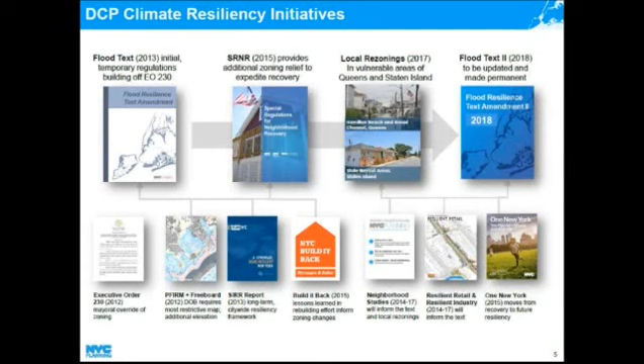To give a brief overview of the 2013 flood text, here's what is allowed. We increased the height limits of all buildings in the floodplain by allowing the height to be measured from the design flood elevation, which is that FEMA reference standard plus an additional level of what we call freeboard, and in some cases to a higher reference point that in essence lifts the entire envelope of the building up to correspond to the new flood insurance, the new flood map requirements.

We also allowed for a discounting of floor space when lost in order to come into compliance where the latest building standards for such things as raised entries, mechanical spaces, and flood areas are required. We allowed for the retrofitting of older buildings, overriding typical zoning rules for non-complying and non-conforming buildings, as well as established design standards requiring elevated buildings to mitigate their impact on streetscape.

In 2015, the City Planning Commission passed the Special Regulations for Neighborhood Recovery, intended to speed recovery from Hurricane Sandy in select neighborhoods with acute problems. This was done by simplifying the process for documenting non-compliances for Sandy-damaged homes, removing disincentives for property owners to make resilient investments, and establishing a new zoning envelope, particularly for narrow lots, so reconstructed homes more accurately reflect the existing cottage neighborhood character.

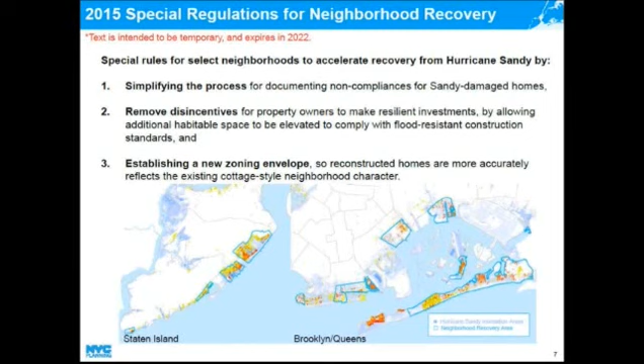While that work was going on, we were also working on a series of resilient neighborhood studies. They include projects in all 5 boroughs: Harding Park and Edgewater Park in the Bronx, Chelsea and West Chelsea and the East Village Lower East Side, and 2 Bridges in Manhattan, the East Shore on Staten Island, Sheepshead Bay, Gerritsen Beach, and Canarsie in Brooklyn, and Hamilton Beach, Old Howard Beach, Broad Channel, Rockaway Park, and Rockaway Beach, all in Queens.

These 10 study areas are intended to help provide lessons learned that would inform the citywide flood text we anticipate moving forward in 2018. We anticipate most issues raised in other areas will be addressed through the citywide flood text. We also intend that the overall approach to land use for coastal areas will be informed by these studies. Most relevant to today, we've identified the need for near-term zoning changes that weren't resolved through the citywide flood text, including Broad Channel, Hamilton Beach, and the Staten Island East Shore.

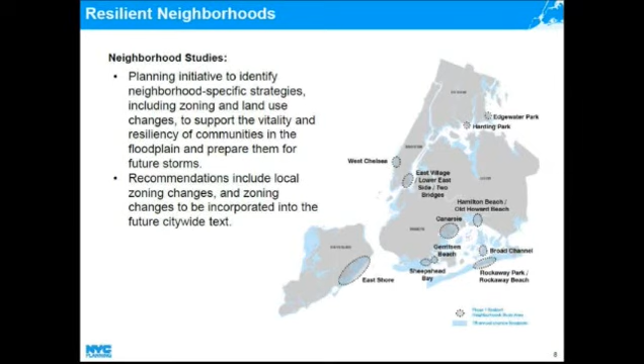But some of it does include inhabited areas as well, including the areas we'll be talking about today, Broad Channel and Hamilton Beach, as well as a portion of the east shore of Staten Island, which will be protected from daily tidal flooding with the Army Corps' proposed levee system.

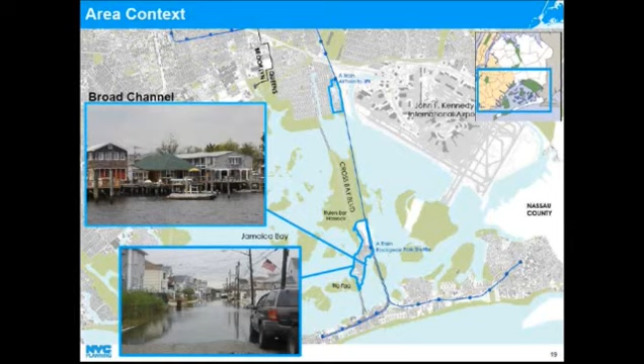A little background on the neighborhood is important to understand our proposal as well. In the late 1800s, this neighborhood was developed with small houses built on stilts as a summer getaway. They were houses accessible by boat. This predated roads. It was formally settled in 1914 by the Broad Channel Development Corporation, which really built the land — they filled it in because it was formerly marshland, and built the first roads.

It wasn't until the 1930s that Cross Bay Boulevard was constructed, really opening up this community to the rest of New York City. But in 1939, the Development Corporation declared bankruptcy, and the city took over ownership of the land. It wasn't until 1982 that an agreement was reached for the residents to purchase the land back from the city. In 1988, the first sanitary sewers were constructed, so it took a long time until infrastructure was developed here, and it is still limited.

And in 2012, it's fair to say it was devastated by Hurricane Sandy. 97% of the households here reported damages during FEMA inspections, and the average NFIP claim paid in Broad Channel was $76,000.

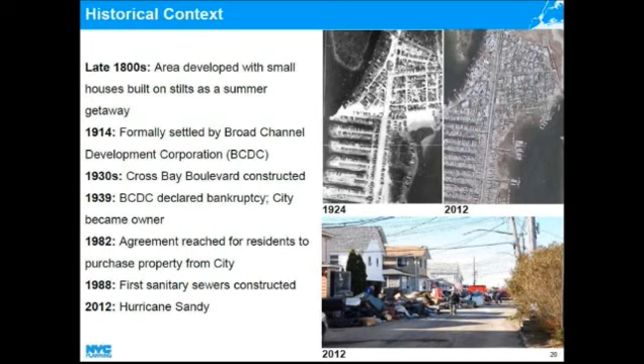In Broad Channel today, there are 2,500 residents and about 1,000 buildings. The local median household income is quite a bit higher than the Queens average, at $68,900. And the percentage of housing units that are owner occupied is also higher, at 78%.

It's also worth noting that all residents and buildings in Broad Channel are in the 1% annual chance floodplain, including — I don't have the exact numbers — a few in the V zone, which is the wave action zone that is especially susceptible to damage.

The zoning in place today is R3-2. It's been in place since the zoning resolution was adopted in 1961. This zoning allows for all residential building types, but in the top left image you'll see the most common kind of lot and building in Broad Channel. The typical lot is 25 feet wide by 100 feet deep, and 90% of homes here are single-family detached, with only 9% two-family detached. There are a few homes that are semi-detached, as seen in the middle picture, but these are pretty uncommon.

So this R3-2 zoning, with a 40-foot minimum lot width requirement and allowance for these other building types, is not really appropriate given the context of the area. In addition, the zoning doesn't reflect that there are a number of marinas and boat parking facilities on the southeastern shore of Broad Channel — that's one thing we looked at in crafting our proposal. There's also a commercial overlay at the center of Broad Channel, a small local retail node with a restaurant, a deli, and things like that. It's zoned C1-2.

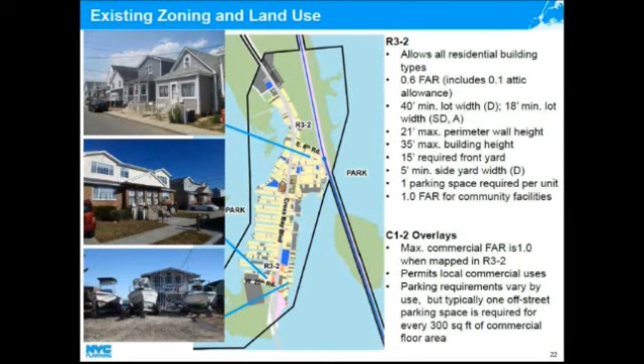On the high end, the 90th percentile projection is for 30 inches of sea level rise on top of high tide, and that would impact 744 buildings out of 1,000. So this is a serious condition that's not really seen elsewhere in the city other than here in Hamilton Beach.

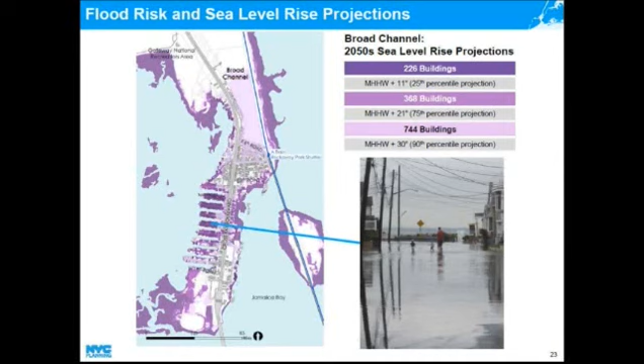Now I'll walk you through the proposal, the actions for Broad Channel, which include a zoning map amendment and a text amendment.

So first, perhaps the most unique part of this proposal is a new special coastal risk district, which would be established in the zoning resolution to provide a new zoning tool to signify flood risk in areas of the city vulnerable to projected future tidal flooding.

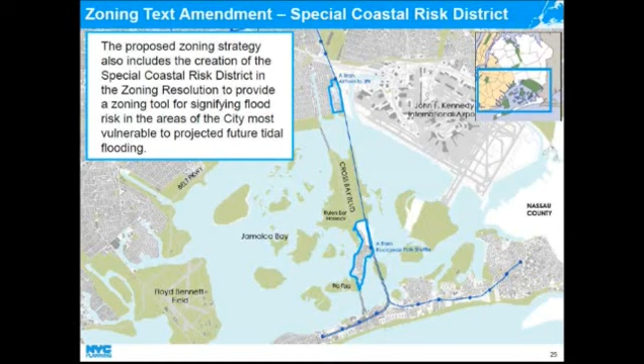So today we are going to talk about two sub-districts that are proposed in Broad Channel and Hamilton Beach that would have the same general purposes section, but would have different rules for each neighborhood to reflect unique conditions.

We're proposing a Broad Channel sub-district over the entirety of the island. It would reflect the neighborhood's exceptional flood risk and establish low-density building patterns by modifying the proposed underlying zoning to only allow single-family detached residences to be allowed here.

We would also prohibit community facilities with sleeping or overnight accommodations. Even though there's a library and a school, there isn't anything like a nursing home here today, but we wouldn't want vulnerable populations to move into an area where there really aren't infrastructure solutions and where we don't think future density is appropriate. So again, the main restriction as part of this sub-district is limiting future residential development to single-family detached only.

This would modify the two proposed underlying zoning districts, one being R3A, which better matches the built conditions here. This zoning district, it's worth noting, has a 25-foot lot width minimum, which is the same general lot width that we find here in Broad Channel. And again, this would be modified by the special district.

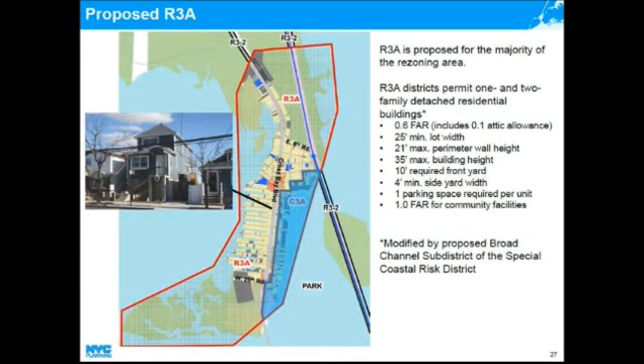We are also proposing a C3A district on Broad Channel's southeastern shore, where I mentioned that there are a number of marinas currently. These marinas could not rebuild under existing zoning - those uses wouldn't be allowed. So we want to allow, if a future storm comes through, we want these marinas to be able to rebuild. We think it's appropriate for the neighborhood character of the area and reflects the type of community that Broad Channel really is.

C3A also has a residential equivalent of R3A, so the same special district restriction would apply here to only allow single-family detached residences in this portion.

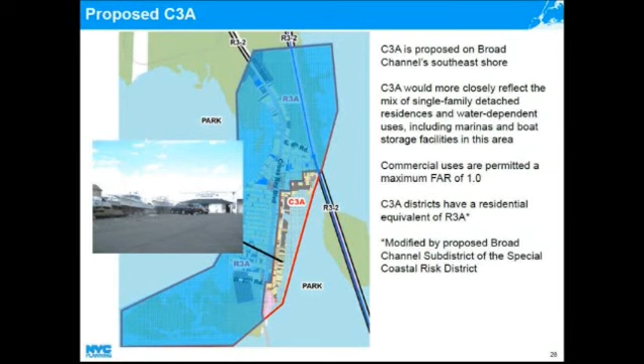Finally, we are proposing to update the existing C1-2 overlay to a C1-3 to slightly reduce the off-street parking requirement. The C1-2 district requires 1 space per 300 square feet of commercial floor area, which existing businesses would have a hard time meeting if they were to redevelop. So the C1-3 requires 1 space per 400 square feet of floor area. This is just a small tool that we can give to businesses here to not disincentivize them from making resiliency investments.

And next, I will talk about Hamilton Beach.

Perhaps before we go to the next item - any questions for Melissa? Okay, Erwin, and then Fred.

Melissa, is the long-term goal to evacuate this area or to maintain this area? Would you like to take that?

That's an excellent question. And I think that as of the moment, we are not suggesting that the policy has to be retreat. But what we are recognizing is that the future, whatever it may be, is going to look very different than that of today's. And so we see this tool, this special district, and the appropriate zoning changes as a way of trying to limit the future density over the course of the next several decades as we figure out what that eventual future may be.

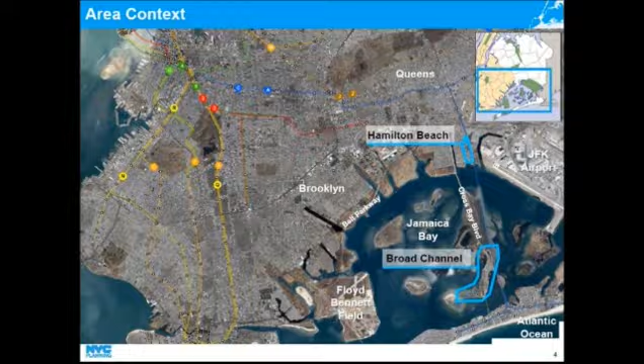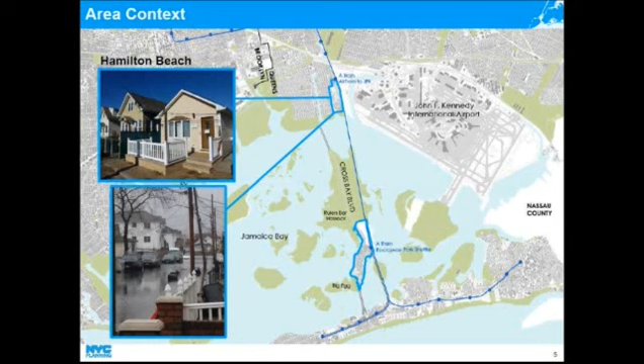Hamilton Beach is also a neighborhood in South Queens that's adjacent to JFK International Airport. It's also accessible by only one road, 102nd Street, which routes through Coleman Square, a small commercial node that serves the A train and AirTrain station. Much like Broad Channel, Hamilton Beach was originally developed with fishermen's shacks on Hawtree Creek. In the late 1800s, a Long Island Railroad station was opened.

And I say station because you had to flag down the train to get it to stop for you, but this supported the establishment of a year-round community. In the early 1900s, Hawtree Basin was dredged, and that was used to fill in the land to allow for additional development. But it wasn't until 1995 that the city first expanded its sanitary sewer system to Hamilton Beach, and before that, residents relied on private cesspools. In 2012, the area was also ravaged by Hurricane Sandy. I don't have the number specifically for Hamilton Beach, but in the combined Old Howard Beach and Hamilton Beach area, 75% of households reported damages during FEMA inspections. The average NFIP, National Flood Insurance Program, claims paid to Hamilton Beach was $52,000.

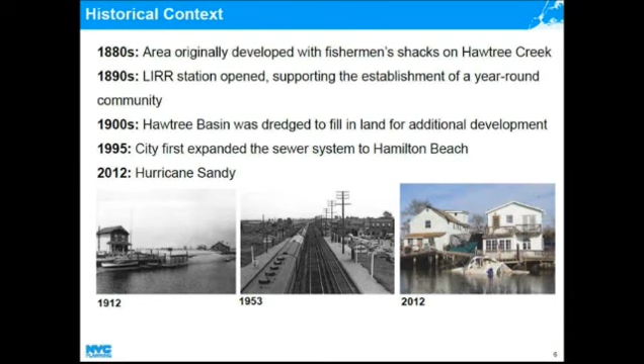This map shows a little better where the one road to access Hamilton Beach is, 102nd Street. Today in Hamilton Beach, there are 1,400 residents and 400 buildings. The median household income is higher than the Queens average at $71,000, and 75% of housing units are owner occupied. Also, it's worth noting that almost all of the residents and buildings in Hamilton Beach are in the floodplain.

The neighborhood is zoned R3-1, a designation that has also been in place since 1961. It allows for one- and two-family detached and semi-detached residences. The one-family detached is the most common lot typology or building type. On the upper left-hand picture, you can see that common building type, this small cottage bungalow, if you will, on a narrow lot. Actually, even narrower lots here than in Broad Channel. Some are 20, 21, 22 feet wide, which is challenging with the 40-foot minimum lot width requirement under existing zoning.

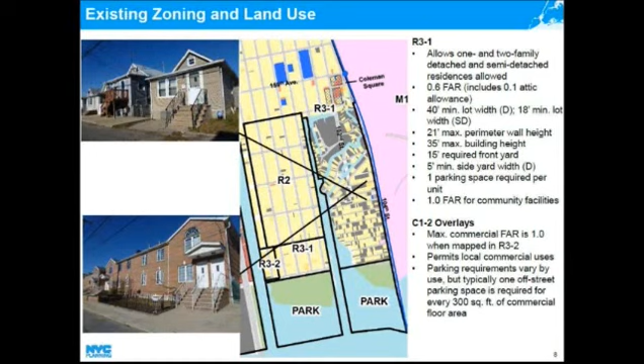7% of the houses here are two-family detached, and 13% are semi-detached, like you see in the lower left-hand picture, so they have this shared party wall. This housing type has actually been more predominant in recent years with the construction of housing on vacant lots. In Hamilton Beach, about 42% of lots are vacant, and 100 of those lots are city-owned. So while not all of those vacant lots are available to the public for development, they could become available in the future, and we think that the semi-detached type allowed now under existing zoning is not appropriate for the flood risk and also for the infrastructure that is currently available.

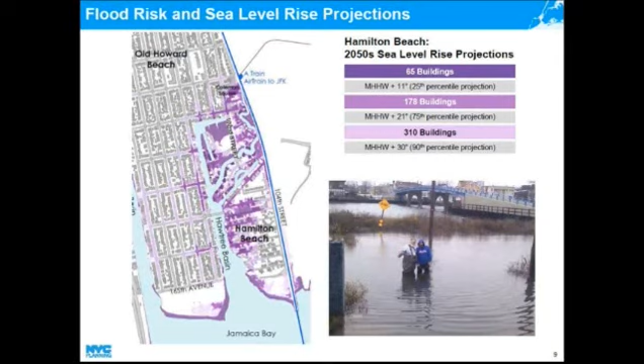This is the sea level rise projections for Hamilton Beach in the 2050s. The low-end projection of 11 inches with high tide is represented in dark purple. 65 buildings out of about 400 would be impacted twice daily at high tide. Under the high-end projections, the 90th percentile projection of 30 inches on top of high tide, 310 buildings out of about 400 would be impacted twice daily.

With that context, I'll walk you through the rezoning proposal. As part of the special coastal risk district that would be established as part of the broad channel application, we are proposing also a Hamilton Beach sub-district that would modify proposed underlying zoning. The sub-district would signify the risk here and limit future development to two-family detached residences only on lots 40 feet wide or greater.

Single-family detached buildings would be allowed throughout the area. The reason for this change or distinction from Broad Channel is that there are actually a wider variety of lot sizes found in Hamilton Beach. So we do want to allow for lots that we think are wide enough and substantial enough to still be built with two-family detached residences. And we still think this meets the goal of reducing overall density in the area. In general, it's the semi-detached buildings that are introducing the most amount of density to the neighborhood.

We would also limit or not allow community facilities with sleeping or overnight accommodations in Hamilton Beach. Today, there's only a volunteer fire department that would count as a community facility, but again, we don't want to allow things like nursing homes that would introduce vulnerable populations to the area.

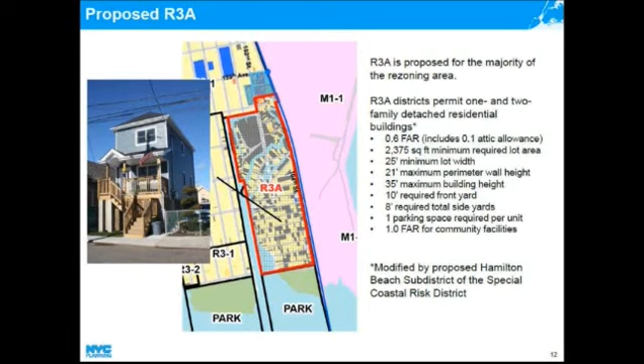We are also proposing to update the C1-2 commercial overlay in Coleman Square to a C1-3 to better match existing commercial uses and development patterns. The C1-2 overlay requires 1 parking spot per 300 square feet of commercial floor area, and the C1-3 would be 1 per 400 square feet. We think this is more appropriate given the built context here and the types of commercial buildings you see on small lots in Coleman Square. And with that, that concludes my presentation for Hamilton Beach.

Okay, thank you, Melissa. Questions? Commissioner Cantor.

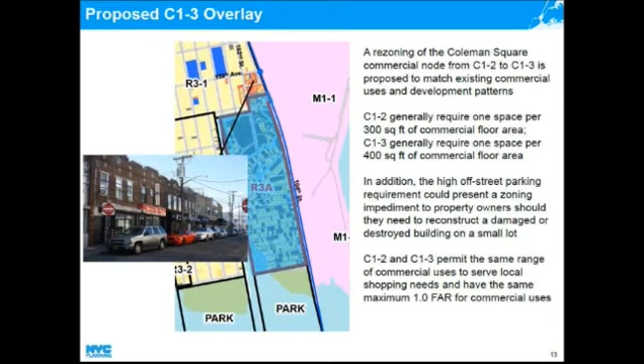The city of New York took a whole lot of fill, rock excavation in various suburbs, and they used it elsewhere in the city. World Trade Center, they dug out enough rock and fill to be able to build Battery Park City. I'm wondering why you guys are still contemplating which way to go long range. With clean fill piles, if you will, could be put on any of those vacant sites to wait for next year.

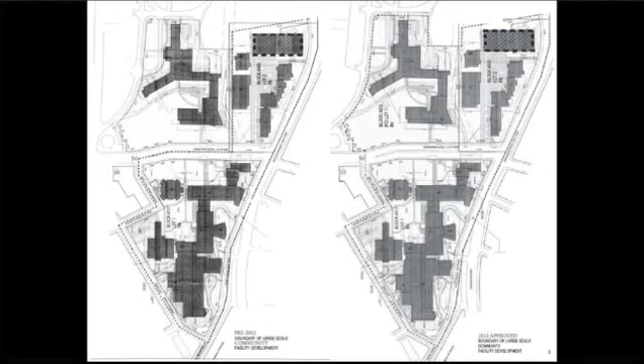Now, the distinction between the upper and lower garages is that the lower garage is mostly below ground, and is for the students and staff of AECOM. The upper garage, seen back here, is for visitors and employees of AECOM.

This was part of the plan that was approved in 2012 by the City Planning Commission. Let me give you the orientation here. You have Eastchester Road, and this curb cut where you saw the two cars.

Gaining access to the upper garage, you walk through here, and you have your ticket spitter here. Now, there were two stations here. They were moved inside, and now they're here, to allow reservoir space for the parking, which they had done before.

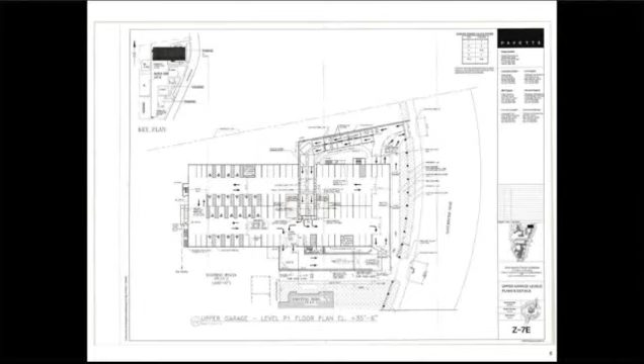I want to mention that the existing garage is currently a one-level garage. It contains 115 accessory parking spaces, and they were approved for expanding to 3 upper levels, for a total of 336 spaces.

This diagram shows the layout of both garages. One sits on top of the other. This hatched one is the lower garage, containing 575 spaces. The current garage here contains 115, and that will change since it was modified.

The previous plan I just showed you, the modification was adding 21 reservoir spaces as well as 20 spaces for the handicapped, and these spaces are wider, so you're going to lose some of the amount of parking you have, which is 115, and that'll become 89 parking spaces.

The upper drawing here is Eastchester Road, which you saw when you looked at the drawing with the stations and the two cars. It's a ramp here, takes you inside for the upper, and the other ramp here, and this is what it will look like following construction.

Now, the construction of the garage itself raises the question of how parking will be treated during construction. We've asked the applicant, and they stated that right now they don't have a concrete plan, but when they do construct the facility, they will have alternate parking, either adjacent to or within the campus. Also, Community Board 11 sent us a letter waiving their right to a recommendation.

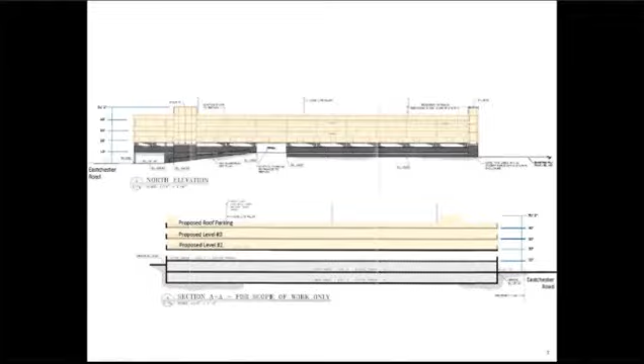Are there any questions? Manny, do you want to advise the commission as to why they did not proceed under the expiring special permit?

Yes, thank you. They are having funding issues. Also, Montefiore has taken over AECOM, so there's the issue of reorganization and priorities. That's basically why they haven't constructed.

I've spoken with the applicant, and their intention is to construct according to the zoning resolution. Under the authorization, special permits can be renewed if you file within 4 years of the approval of the application, and then you have an additional 3-year term.

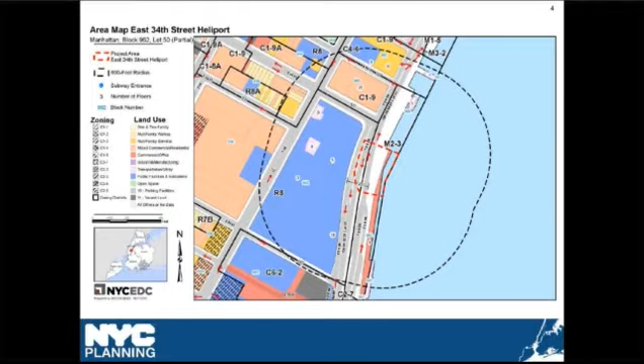The project site access is primarily provided by East 34th Street and the FDR Service Road. The East 34th Street heliport is a city-owned facility. The total lot area, exclusive of underwater leasehold property, contains approximately 40,000 square feet, of which 26,442 square feet is used for heliport operations. Here are pictures of the existing conditions of the heliport.

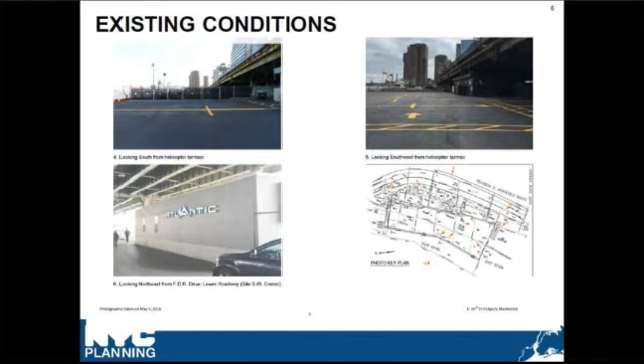There are no proposed plans to physically modify the heliport. However, the applicant has stated that the New York State Department of Transportation will not allow construction to occur because no buildings are allowed beneath the FDR highway. Therefore, the applicant is proposing to exclude the condition from the previous special permit approval relating to the construction of a permanent waiting area.

The heliport is to be operated Monday through Friday, 8 a.m. to 8 p.m., and will continue to serve the business community, police operations, medical evacuations, and the print and electronic media. EDC's contract with Macquarie Aviation North America will expire in August 2017, with a 6-month extension through February 2018. Prior to the conclusion of the extension period, EDC plans to issue an RFP for an operator to manage the heliport until the end of the term approved by the special permit.

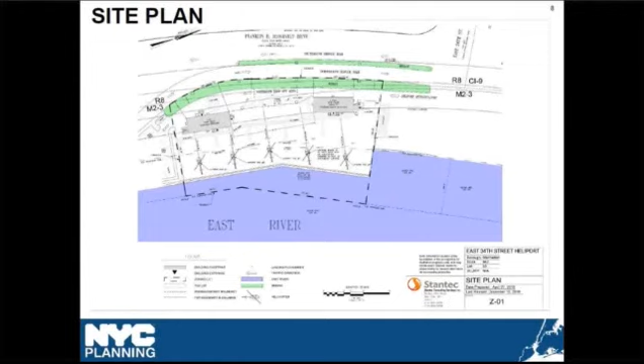Questions? Commissioner Cantor: Jamie, is the sightseeing limited to weekends? Response: There will be no sightseeing tours. Follow-up: There will be no sightseeing at all? Response: No.

Other questions? Commissioner Cerullo: It's not so much related to this, but it triggers a question. Is the monitoring of compliance a self-policing and filing mechanism? You could lose count after 1,655 flights if somebody's sitting there. What is the process of ensuring compliance? Response: Yes, it's a good question. I'll have to follow up with EDC and get back to you on that.

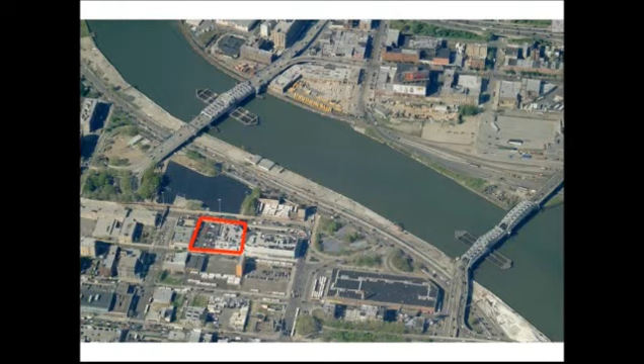The project objectives are fairly straightforward. The Department of Sanitation wants to consolidate its existing facilities from 3 locations to 1 location within Community District 11 to serve Community District 11. As I said, they want to relocate their district garage on 99th Street, as well as their lot cleaning headquarters on 123rd Street.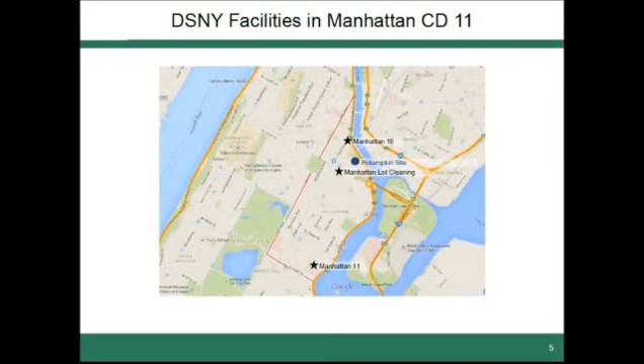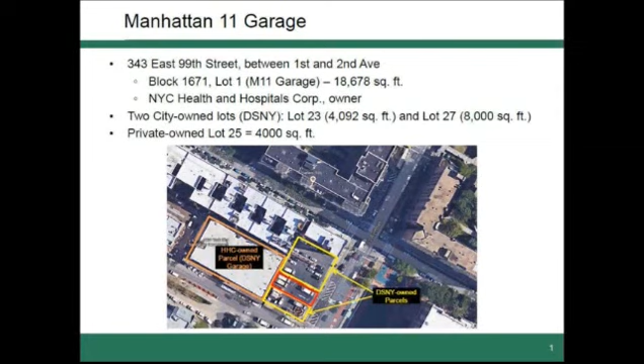There are certain deficiencies with the current location at 99th Street that are precipitating sanitation's move from this location. One, as mentioned, there are vacant lots located on 2nd Avenue — two of them are managed by sanitation, outlined in yellow. The red lot is privately owned and leased by sanitation, and the garage itself is leased by sanitation from the Health and Hospitals Corporation.

There are issues. The Manhattan 11 garage is undersized and in very poor physical condition, especially on the 2nd floor, where they cannot park any vehicles. You can also see equipment stored on the street, including snow plows, with a Jersey barrier separating them from parked vehicles to the east. As mentioned previously, there's been new residential development nearby, and this garage is located directly across the street from Metropolitan Hospital.

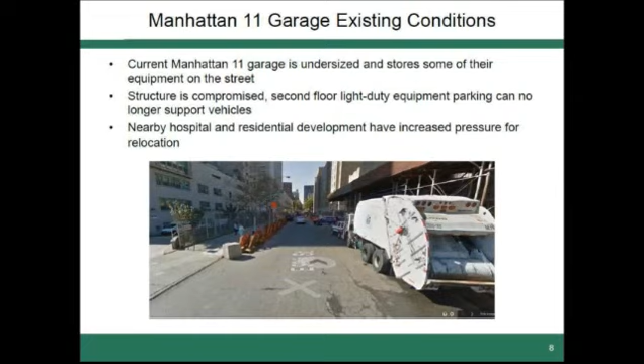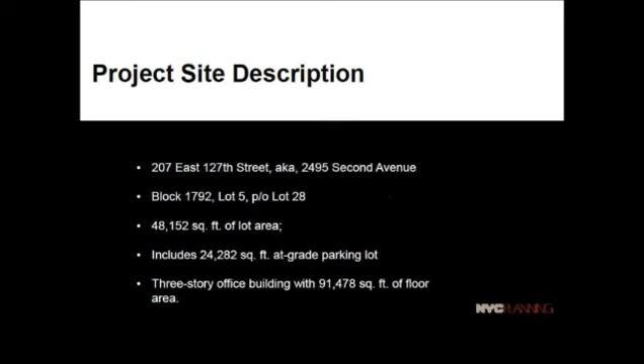So, the project site description—this is the project site on 127th Street. The site that sanitation is seeking to acquire is on block 1792, lot 5, and part of lot 28. Again, it has 48,000 square feet, and there's a 3-story office building located on the site as well.

You can see the rest of the block is developed by a Potamkin auto dealership, which anchors the eastern portion of the block. There's a church anchoring the western portion. Directly across the street you have a city park—Crack is Wack Park is located right here. Also directly across the street, you have a site that's going to be developed as part of the New York Proton Center, a new nuclear medicine facility currently under construction.

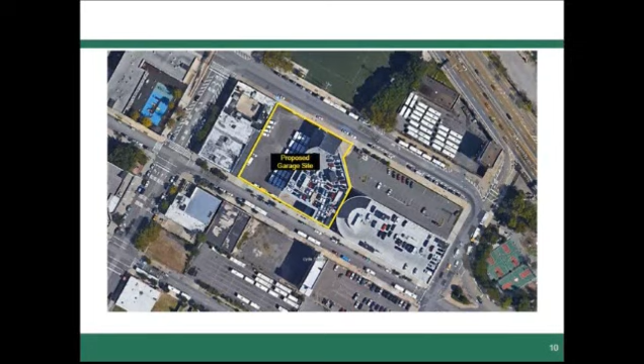Walking the commission through the rest of the block, this is an image that shows 127th Street. You can see the project site and the Potamkin building that abuts it, and this is looking south from 128th Street—again, you can see how that lot is developed.

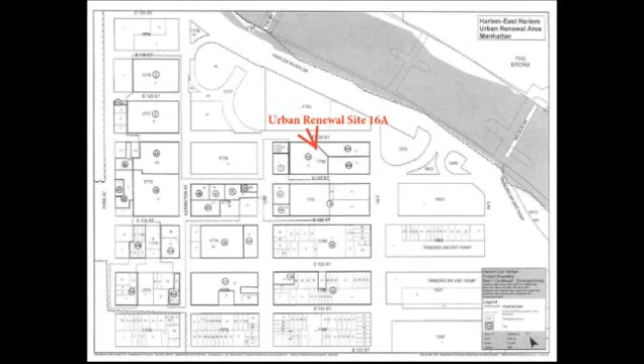The project site is also located within the Harlem East Harlem urban renewal area. Between 1991 and 1994, it was used as a material recycling facility. That facility was shut down in 1994 as part of the waste management plan initiative the city had implemented at that time. This site is designated as Site 16A within the Harlem East Harlem Urban Renewal Plan.

A map showing existing land uses in the area. Again, we know what's happening on the block—the commission saw that in a previous image. The Proton Center development site is located here. You have a mix of residential and commercial uses south of 125th Street, and mostly auto uses and some institutional uses, as well as open space uses located north and west of the site.

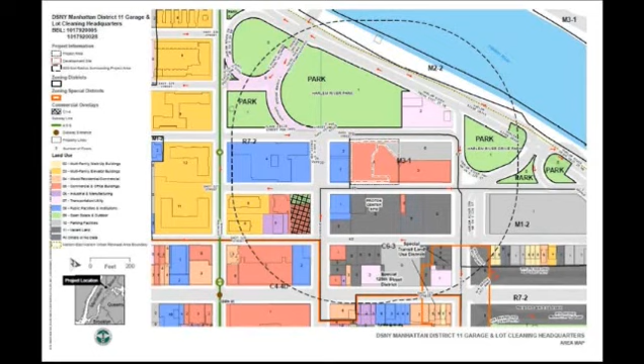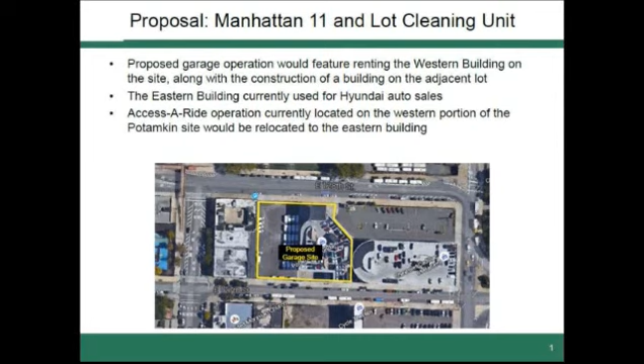So the proposed project would feature repurposing this building and building an extension, as well as using a portion of the parking lot to park sanitation vehicles. There are vehicles you can see in the image right now—these are Access-A-Ride vans. These vans would be relocated to this lot right here.

This is the project site and plan—the existing 3-story building, again 91,000 square feet. An addition of about 8,700 square feet would be built, serving as a truck washing station as well as providing space for maintenance and repair. The rest of the lot would be open storage, with trucks parked on that paved portion of the parking lot.

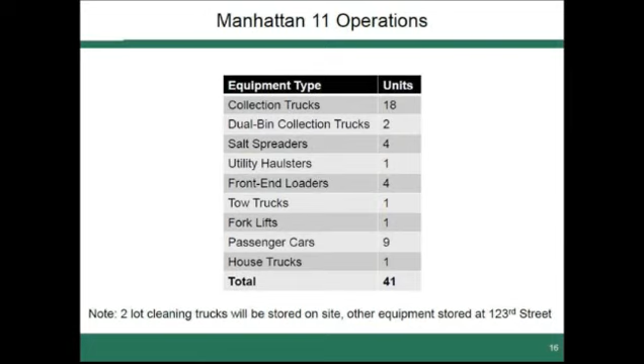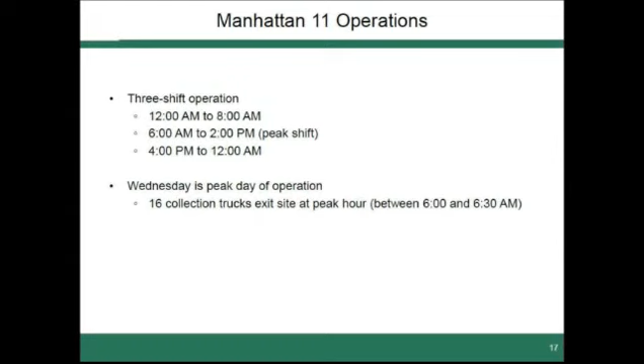This is the operations breakdown. There would be 41 vehicles stored there in total, most of them collection trucks serving Manhattan Community District 11, being relocated from the garage on 99th Street. However, recall the lot cleaning unit's large vacant land assemblage of about 19,000 square feet—sanitation will hold onto that and park their lot cleaning equipment there. This will be a 24-hour facility. The commission can see the different shifts: midnight to 8, 6 to 2, and 4 to 12, with peak time on Wednesday between 6 and 6:30 a.m.

And these are the requested actions. Site selection by lease, the Department of Sanitation and the Department of Citywide Administrative Services are the applicants. It would acquire a lot that we talked about in our presentation, again, 48,000 square feet or so, and also there's a 91,000 square foot building on that parcel.

There would be an amendment to the Harlem East Harlem Urban Renewal Plan that would change the site designation from materials recycling facility to light industrial. That designation is more compatible and more consistent with the proposed use for this site. Also, there would be some cleanup action in terms of amending the urban renewal plan to make sure the site boundaries reflect what is currently there now. With that, concludes my presentation. I'll take your questions or comments.

Thank you, Edwin. Questions? Commissioner Efron?

Thanks for the presentation. 128th Street, the Crack is Wack park that's just to the north of the facility. Is there any way the Parks Department can tell us its peak hours to make sure that the trucks idling and queuing to get into the overhead gate on 128th Street doesn't match up with when most children are there, which does seem like something to really consider.

I don't know what the access is from that part, whether it's gated on that side, or it would just be helpful to know if kids are crossing the street there, or if there's another pedestrian exit elsewhere in the park.

Other questions? Commissioner Levin? Yeah, Edwin, I have a hard time visualizing the capacity of this new space matched up with the information that's provided about the number of vehicles that would call this garage home. Are all of those 41 vehicles going to be able to park there if it's ever required? Or are they out floating around enough so that we don't have to have parking spaces for all of them?

All the vehicles, the sanitation vehicles, will be accommodated on site. These are vehicles of various dimensions. There are 18 collection trucks, but there's also smaller trucks like SUVs, smaller cars that sanitation uses.

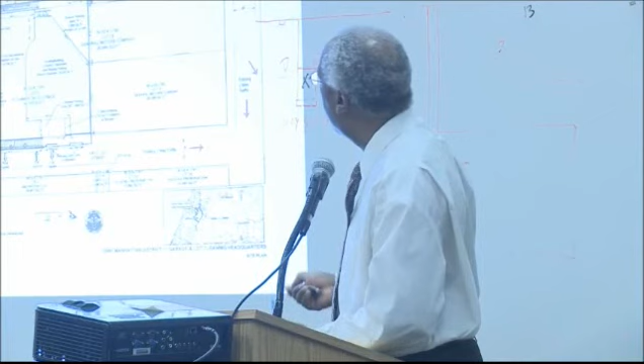This is an image that shows what is proposed for the site. This is the existing building, and this is the proposed building that would provide space for the maintenance and for truck washing. And this is where the trucks would be parked outside.

Okay, so no trucks parked, unlike, sanitation has a great record of building really fabulous new sanitation facilities around the city. I've seen one in Brooklyn, and there's one at the end of West 57th Street, and there's one at Spring Street. They really do just a terrific job. This one looks like it's not going to present the same wonderful design possibility that they've been able to achieve at other locations.

So maybe all I'm asking is that when it comes back through public review, I'm sure we'll hear about this from the community board and the borough president. I'd really like to understand how this site is going to work for that intensity of use.

Particularly as we plan for a lot more residential use nearby, and knowing that there are 2 churches and a school to the west, it's a challenging location.

Commissioner Efron: Just want to add to that astute comment, that it's visible from the FDR, and it is many people's first or second view of Manhattan. And with Crack is Wack, which I think might even be landmarked—it is—it does seem important aesthetically. It has something there that's at least not aggressively bad.

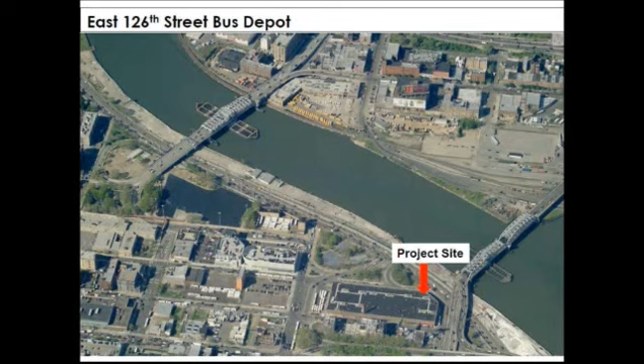Okay, so this is the second project that I'll be presenting to you, located in East Harlem. The Economic Development Corporation is seeking several discretionary approvals to facilitate the 126th Street African Burial Ground Memorial and Mixed-Use Project. The project would repurpose the former East 126th Street Bus Depot site, located in the northeast portion of Manhattan Community District 11. This is the Bus Depot site. It occupies a full block bounded by Second Avenue, Third Avenue, 126th Street, and 127th Street.

The proposed actions are a zoning map amendment from M1-2 to C6-3. The C6-3 rezoning would basically extend an existing C6-3 district located opposite the site to the west, on the west side of Third Avenue. A zoning text amendment would designate the project site as an MIH designated area to facilitate affordable housing through MIH. A city map amendment would narrow a portion of Second Avenue and convey a small portion of the demapped area, appending it to the project site. Also, a disposition of city-owned property, which is the disposition of the bus garage as well as the demapped portion of Second Avenue.

Now, the project location is in the northeast portion of East Harlem, located right here. The bus garage is approximately 105,000 square feet; the footprint comprises that. The bus parking area, just outside of it along Second Avenue, is about 9,700 square feet. The total area is a little more than 115,000 square feet. If the commission will notice, there is this trapezoidal area here—this is the African burial ground, the remnant of a former cemetery, which I'll talk about later in my presentation.

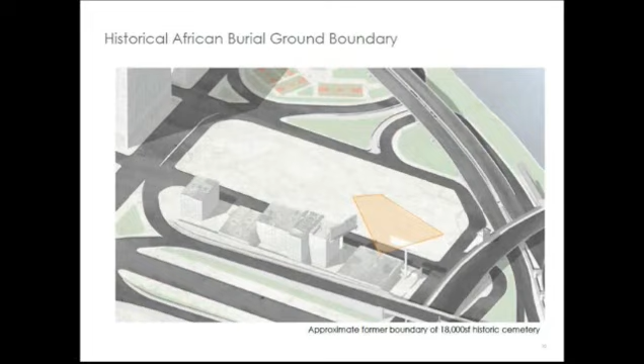This shows the burial ground, and this is basically the footprint of the bus garage and the adjacent parking area. You can see that the burial ground extends into the footprint of the garage, and a small portion of that extends under the bed of 126th Street.

These are images that show the existing built condition. You can see the garage located right here. This is the Triborough Bridge, the Bronx is over here, this is Second Avenue, this is Third Avenue. This is what the garage looks like right now - it's an existing two-story building. This is another image showing it looking south from 127th Street.

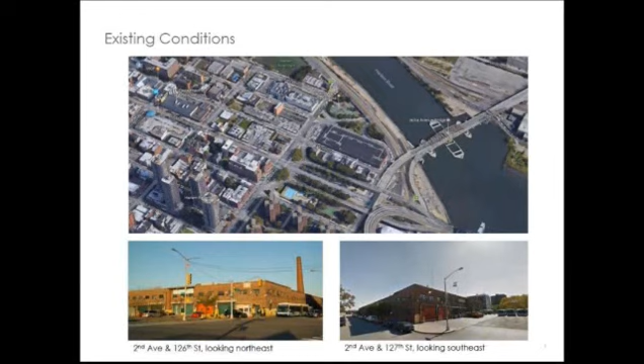The garage was in operation from the 1940s till about 2015, when the MTA vacated the garage. The buses were relocated to a new facility located on Lenox Avenue, also known as Malcolm X Boulevard, between 146th and 147th Streets.

This image shows the larger neighborhood. Again, this is the bus depot, and just to orient the commission, this is 125th Street right here, this is the Triborough Bridge. The area north of 125th Street, as we saw in the previous presentation, mostly has auto-related uses and a lot of vacant lots. This is the DSNY site, the Department of Sanitation site that we just spoke about right here.

South of 125th Street, you have residential uses. You have Taino Towers, which is located right here, and the Robert Wagner Houses, which are a public housing development, also south of 125th Street.

But most notably, we've also had some new construction. This building right here at the northwest corner of 124th and 2nd Avenue is the Tapestry. This building was built as part of the 125th Street rezoning, which the commission approved in 2008. There are 185 residential units in this building, of which 37 are permanent affordable through the inclusionary housing program. This is the first building to use the inclusionary housing bonus in Harlem.

The existing zoning is M1-2. As the commission is aware, M1-2 districts allow light manufacturing uses. Residential uses are not permitted as of right, and certain community facility uses are allowed as well.

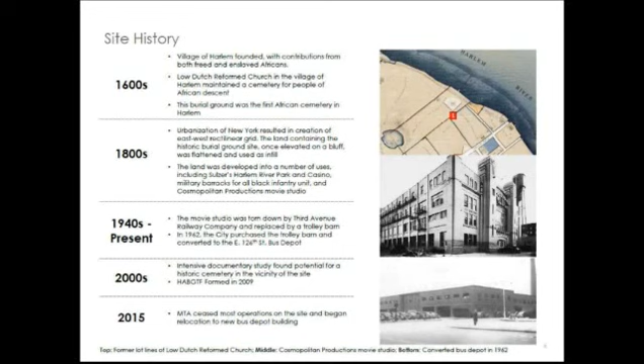The African Burial Ground Task Force was founded in 2009, and its purpose was to memorialize the history and the fact that a burial ground existed on this site.

There were three things the task force wanted to reinforce. One was that this is an iconic and timeless place that should be memorialized in some way, and to talk about and reinforce the historical significance of this site.

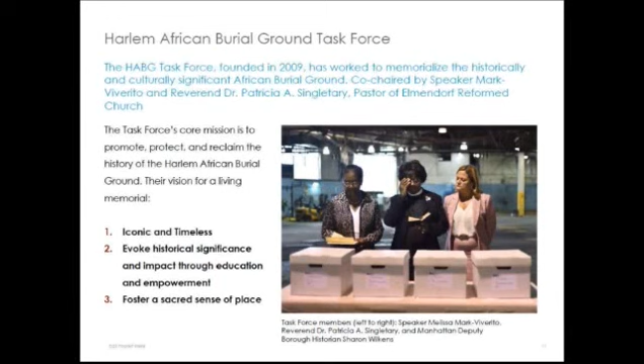The archaeological process was very extensive, running in parallel with the work of the Harlem African Burial Ground Task Force. It started when DOT, while rebuilding the Willis Avenue Bridge, found through their archaeologists a potential for remains on or near the site.

So there was significant archaeological work done. In 2011, a Phase 1 study was done by the MTA, and in 2015, as I said, the MTA ceased its work on the site.

What was found as a result of the archaeological work: they did not find any funereal or intact bodies on the site, but they did find some disarticulated skeletal remains in the northeast quadrant of the site, closest to the river.

It's their belief that the cemetery was probably disturbed as development ensued through the 1800s into the early 1900s, and the found artifacts and remnants of the souls are being held in a safe, secure, and climate-controlled place by AKRF.

Ultimately, when all the remains are found, since the work is ongoing, they will be placed in the New York City Archaeological repository, which is also a temperature-controlled, safe, and secure place. So in terms of the planning process...

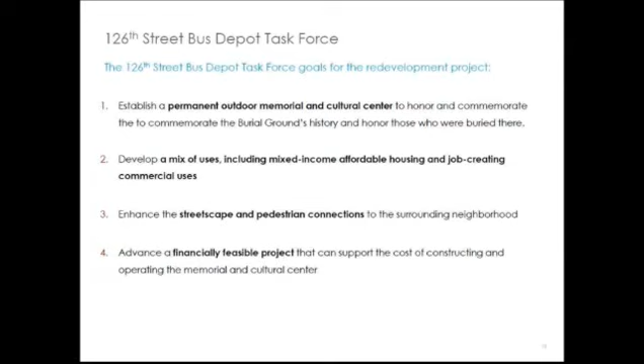Enhance pedestrian and streetscape connections, and also create a project that can be built, one that is financially feasible as well.

After ULURP, EDC will issue an RFP. The RFP will have certain elements like urban design guidelines, and there will be a protocol for the ongoing archaeological work regarding the African burial ground. It will be used to provide a development framework for developing the entire bus garage site as well as the African burial ground.

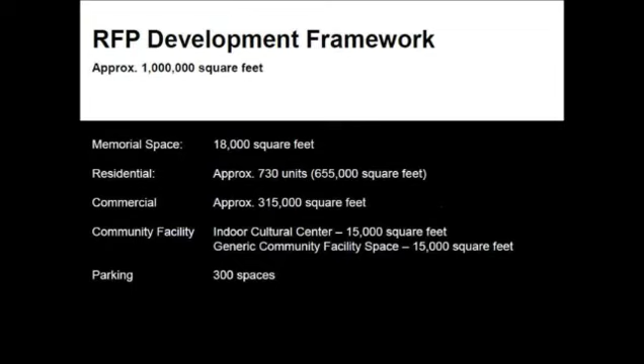Now, there are a number of requested actions that the applicants are seeking. One is a zoning map amendment from M1-2 to C6-3.

C6-3 is a general commercial district which allows under MIH a residential FAR of 8, a community facility FAR of 10, and a commercial FAR of 6. The C6-3 district would basically be dragging the C6-3 district that was mapped as part of the East 125th Street project back in 2008 across the street to cover the proposed development site.

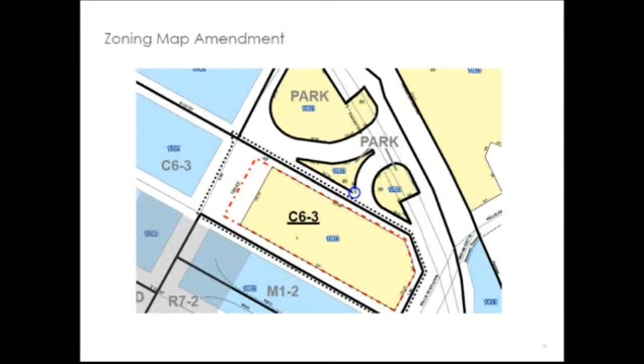A zoning text amendment would designate the project area as an MIH designated area. Option 1 provides affordable housing for 25% of the residential floor area at 60% of AMI, roughly $45,000 a year. Option 2 is 30% of residential floor area at 80% AMI, about $60,000 a year. That will be mapped across the entire project site.

The city map amendment would demap this portion of 2nd Avenue so that it could be appended to the entire project site. Again, the entire project site would be about 115,000 square feet. There will be easements mapped as well for sidewalks.

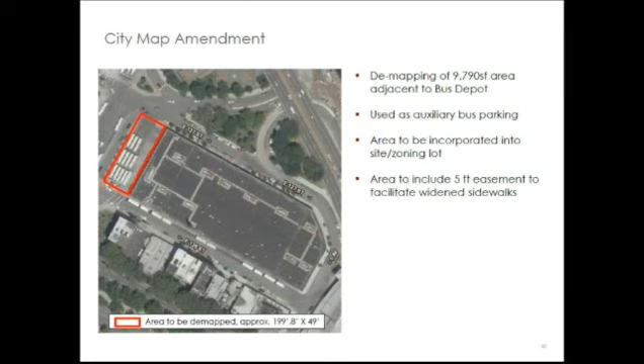And the disposition of city-owned property. The disposition would include the bus garage and the adjoining demapped property. DCAS is the applicant for the requested disposition action.

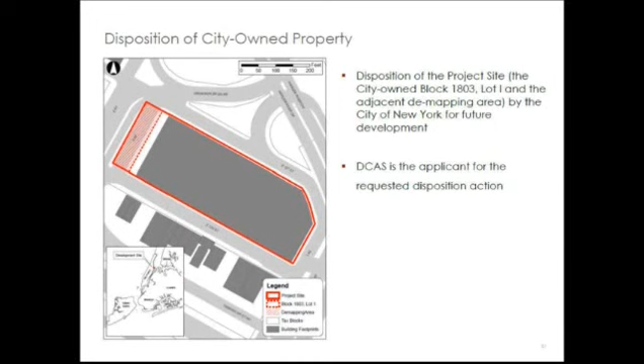Also, as I said before, an RFP will be let after ULURP approvals are received to fashion and fine-tune the project and select the developer.

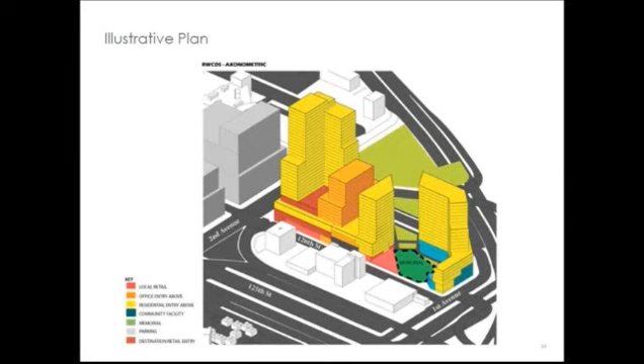With that, I'd like to end my presentation with the way this project began, with community. It began with community, it continues with the community. With that, that's my presentation, and I look forward to your questions and comments.

Thank you, Edward. Very comprehensive. Questions for Mr. Marshall? Let's not let that presentation go to waste.

Commissioner Efron. Thank you. It's an excellent presentation. Really appreciate it. It was complicated, but you made it seem very simple.

I do have a question about the schematic you showed us and the massing. There's a part between the FDR and the project, which looks quite filled with trees, as has been photographed in the aerial photographs. Is there any concern about the shadow of the buildings on the north end and what will become of the two parks?

The short answer would be yes. Again, this is illustrative; this is not what the project will look like. But it gives you an idea of, with the different uses, how they could be massed within this project. The buildings may be lower than what we see here. We'll know after we craft urban design guidelines and the developer responds to that. But the short answer is that there would be some concerns about shadows on the parks, absolutely.

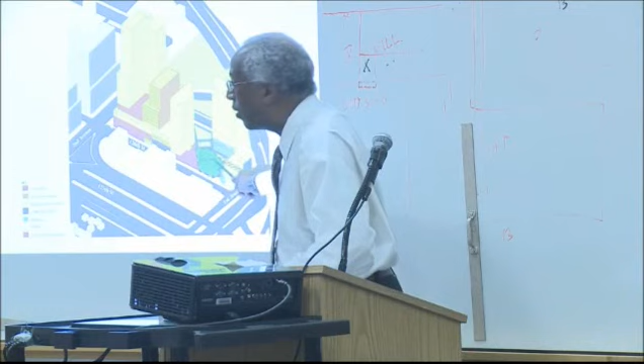So we did something very similar to that in 2008. With this project, we have a disposition of city-owned property, so there's definitely a mechanism in terms of looking at how we can codify certain things. But we'll definitely be working with EDC on the RFP, because that'll basically shape what the project will look like. The only absolute I can say at this point is that this area here has to remain open to the sky. This is set. This 18,000 square feet is set. Everything else we'll discuss during the creation and vetting of the RFP.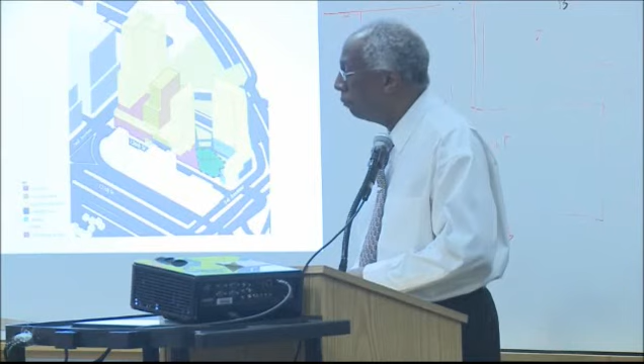That obviously is a very important part, and I would note that the archaeological work is still ongoing, so we know there needs to be some place open to the sky, but we don't yet know exactly what shape it needs to be. That's correct. We do know that the footprint of the burial ground is 18,000 square feet, and the archaeological work continues. No construction will take place until the archaeological work is completed. And that's also going to be laid out in the RFP as well.

Okay, but that's after we're done with it, so we all have to figure out how we play an appropriate planning role here. Just one follow-up question. Inasmuch as Commissioner de la Uz is not here, I feel compelled to ask, what is the area median income in CD 11? I should know, I'll get back to you. Okay, because I think it's probably significantly less than the 80% AMI that is proposed on this site, and so that begs a question about the affordable housing program that will be part of the RFP, and again, something that we all care a lot about, too.

Thank you. Other questions for Edwin?

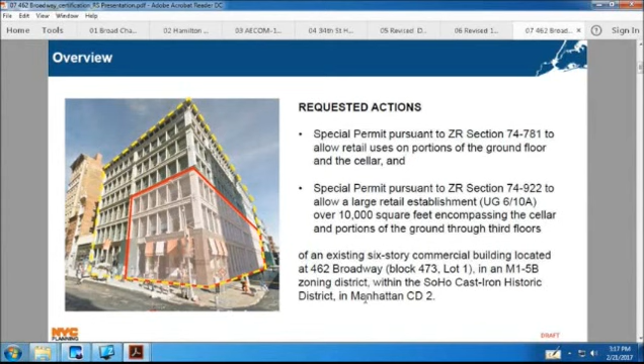As shown on the area map, the site is located at a corner of Broadway and Grand Street. Here's the project site. Located within an M1-5B zoning district, the surrounding area is predominantly zoned as M1-5A and M1-5B districts, which permit light industrial and commercial uses as of right up to 5 FAR, and community facility uses up to 6.5 FAR. Residential use is not permitted as of right.

In the M1-5B district, retail uses are not permitted as of right below the level of the second story. And in M1 districts, certain retail stores over 10,000 square feet are not permitted as of right and require a special permit under Section 74-922.

The project site is located in the Soho neighborhood along the major commercial corridor of Broadway. Once a primarily manufacturing area, over the years the area has evolved into a mixed-use district. Buildings within the vicinity of the project site, in particular ones along the Broadway corridor, are typically loft buildings ranging from 5 to 7 stories and house retail establishments on the ground floor and commercial offices on the upper floors.

Many other buildings have been converted to joint living-work quarters for artists, lofts, or use group 2 residential uses on the upper floors, and have retail or other commercial uses at street level.

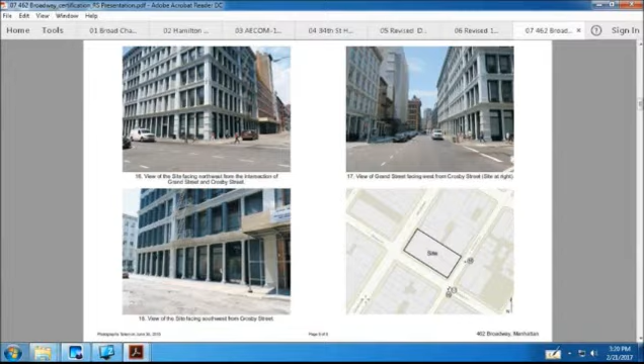As shown on the site plan, the zoning lot of the project site measures approximately 20,127 square feet and has about 100 feet of frontage on Broadway, as well as on Crosby Street, and about 200 feet of frontage on Grand Street.

The northern and southern portions of the building, again, could be accessed separately. So this is the northern portion, which is not part of this application. The southern portion could be accessed through both Broadway and Crosby Street entrances.

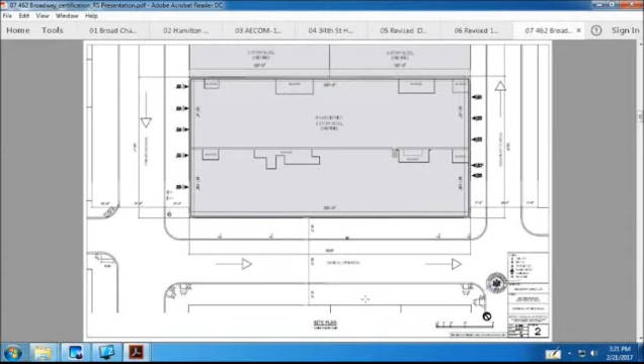The existing building contains approximately 117,274 square feet of floor area and an FAR of 5.8.

Specifically, the entire cellar, approximately 16,567 gross square feet of the cellar, 8,668 square feet on the ground floor, 9,983 square feet on the second floor, as well as the same square footage on the third floor, which are currently vacant, would be reoccupied by a single retail establishment.

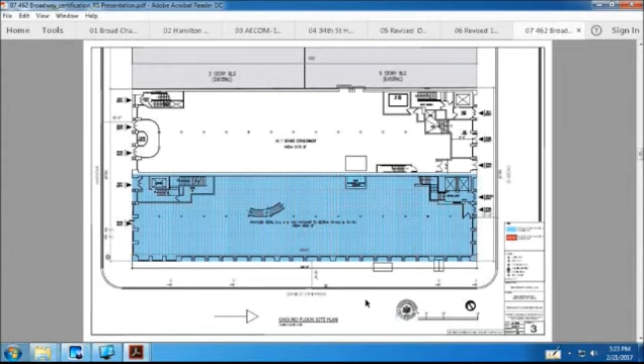As proposed, going back to the site plan, here you can see the proposed retail entrance. Loading and unloading would happen on Crosby Street. Goods could be delivered into the retail store using the service entrances and could be delivered to the cellar using the freight elevator existing in the building.

Section 74-781 allows the Commission to modify the use regulations of the M1-5B district to allow retail use below the level of second story, provided certain findings regarding the owner's marketing efforts could be made. Prior to filing the application, for over a year the applicant pursued marketing efforts to rent the subject ground floor and cellar space for conforming uses. According to the applicant, despite these efforts, there had been no inquiries or requests for long-term use of the vacant space for as-of-right heavy commercial or light manufacturing uses.

A detailed documentation of the applicant's marketing efforts is provided in the applicant's statement of findings, along with sample marketing materials. Section 74-922 allows the Commission to modify the use regulations of the M1 districts to permit certain retail establishments over 10,000 square feet, provided the following findings relevant to this application could be made. Again, the applicant's statement of findings associated with this special permit is included in your packages.

Please also note that staff has received emails from community members opposing this application. Staff received approximately 35 emails as of today. And that's it for the presentation. I'm happy to answer any questions.

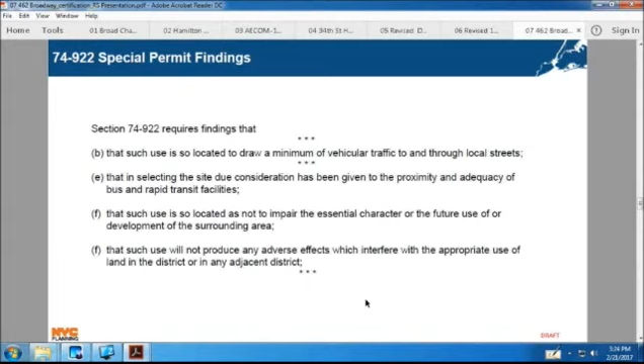Thank you, Sylvia. Questions? Commissioner Marin, then Commissioner Levin, Commissioner Esser.

My question is not to Sylvia, but to the department. I know we had a conversation about these special permits, 74-780, 74-781, and the department studying a different route to these types of actions. Do we know where the department is at this point with that?

Anybody speak to that? As Carl previously mentioned at review sessions and public hearings, the department would be working with the Manhattan Borough President's Office and Councilmember Margaret Chin's office to pursue a study for the Soho-NoHo area. So far, we've finished the research data collection phase of the study, and we've shared some findings with the Borough President's Office and Councilmember Chin's office. But so far, I guess there's discussion pending with regards to next steps for the study.

The only other thing I would add is, as you all know, we are going through a transition, so we're going to wait for the new chair to be in place. Since the study has not yet started, we'll be briefing her on this and then can update you on where we go with it.

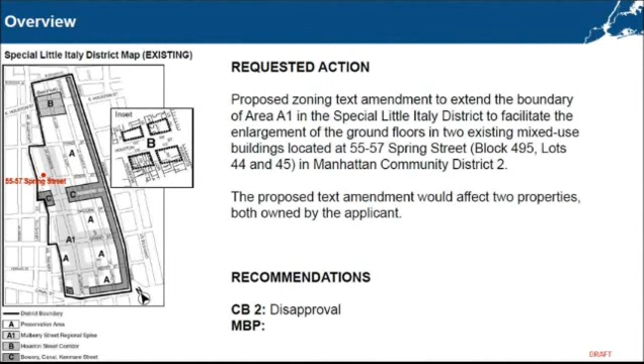Here's the project site. It's in Preservation Area A, immediately west of Area A1, the Mulberry Street corridor. As shown on the area map, the project site is located mid-block between Lafayette Street and Mulberry Street on the north side of Spring Street. The surrounding neighborhood is characterized by residential and mixed-use tenements dating from the 1820s into the mid-1920s, generally ranging from 4 to 7 stories in height. Many of the tenements were built with ground floor retail space and are currently occupied commercially as well.

The project site includes 2 existing buildings shown here, built around 1871. Both buildings are 5 stories in height, have an FAR of about 3.4, with ground floor commercial and residential above. The 2 buildings have a total of 33 residential units, 28 of which are occupied, and include 7 rent-regulated units in total.

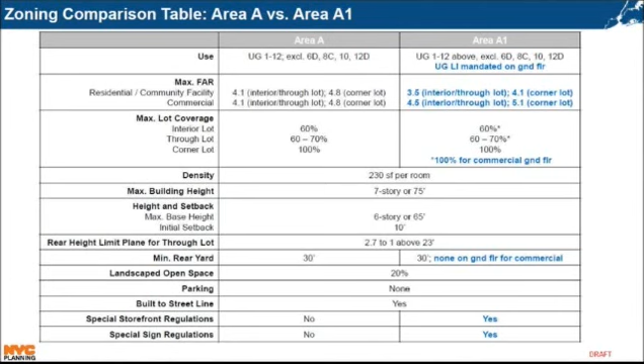The regulations of these 2 sub-areas are substantially similar, except that Area A1, the Mulberry Street regional spine, highlighted here in blue, prioritizes commercial uses, and allows ground floors that are commercially occupied to fully cover a lot. Whereas in Area A, lot coverage for interior lots is limited to 60% throughout the building. As shown on the illustrative site plan, both buildings currently have a non-complying lot coverage of almost 70%, which cannot be increased under Area A regulations.

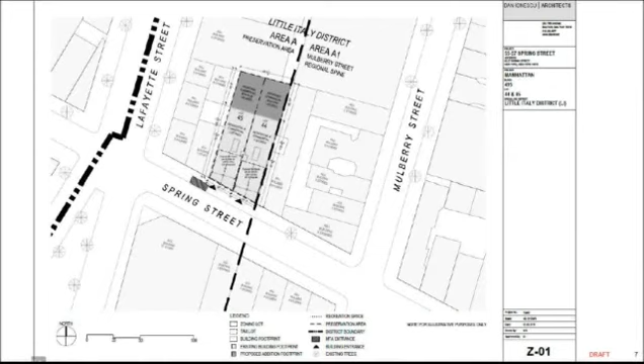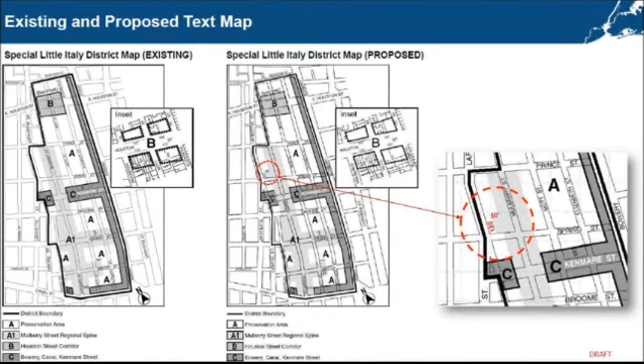To facilitate expansion of the commercial ground floors to full lot coverage, the applicant seeks to amend Appendix A of Article 10, Chapter 9, Special Little Italy District Map, to extend the boundary of Area A1, shown more clearly here, towards Lafayette Street by 50 feet to a depth of 120 feet, to include the 2 buildings at 55, 57 Spring Street.

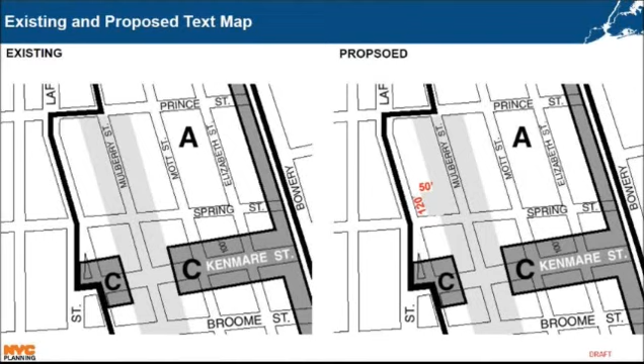The application was referred out to Manhattan Community Board 2 and the Manhattan Borough President on October 17th, 2016. At its full board meeting on February 16th, Community Board 2 adopted a unanimous resolution recommending denial of the application. You should find it in a separate package in front of you.

The Community Board's recommendation cites concerns about intensifying retail uses on Spring Street, growing conflict between commercial and residential uses in the neighborhood, and other issues including the building's DOB filings, deregulation of previously rent-regulated units, and impacts of construction on existing building tenants.

The applicant submitted a series of letters to the Community Board during their review, also included in the package, summarizing the rationale of the proposed text amendment and responding to some community concerns. In the correspondences, the applicant expressed willingness to commit to prohibiting eating and drinking establishments with a hard liquor license, and to not combining the retail spaces in the 2 buildings to form a larger retail space. The applicant also proposes a building management plan to mitigate potential construction impacts on tenants, and clarified that among the 28 existing tenants, 23 expressed support for the proposed development and 4 opposed the proposal.